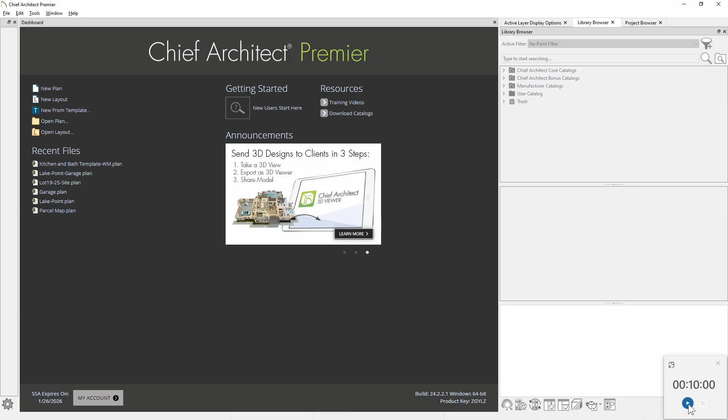So let me open up the program here. Notice in the bottom right hand corner is my timer. Keep an eye on me as we only have 10 minutes to create this mailbox. So let's turn on the timer, and let's begin with a brand new plan. The first thing I'm going to do is, underneath our cabinet tool, come down and grab the custom countertop, click and drag.

While I'm dragging that out, I'm going to put the coordinates in at 24 by 24 to create that custom countertop. Now let's open up the countertop, and inside the countertop we want to set the thickness to be 6 inches and then the height, floor to bottom, should be at 0. And then on the molding profile, this is the edge profile.

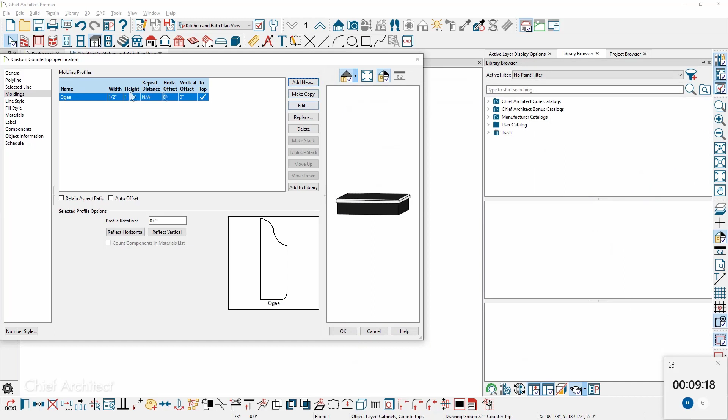Let's click Add New. I'm going to go into our bonus library that I've downloaded, and for the edge profiles, let's select the Ogee profile. We'll set a width of 1/2 inch. You see the profile of it there.

And then let's use the 3D solid tool, and I'm going to create a solid right over the top of this. We'll use our snaps and grab this solid, open it up, and for the solid we'll set the height. This will be the brick, 2 1/4 inches, and then floor to top we want at 8 1/4 inches, so that'll sit on top of the 6-inch countertop.

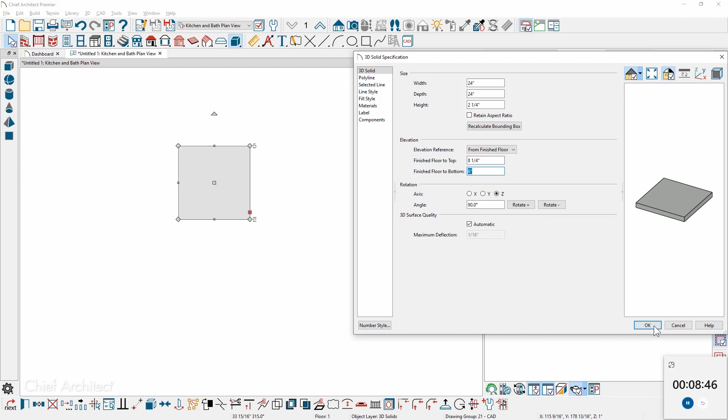So I'm going to use the 3D camera tool. Let's hold our Alt key down to force it into vector mode, and we now have the two objects that we need to apply materials to. So let's begin with a search for stucco. I'm just going to come down and grab a material out of the stucco. Let's apply that onto the molding, also to the countertop below it.

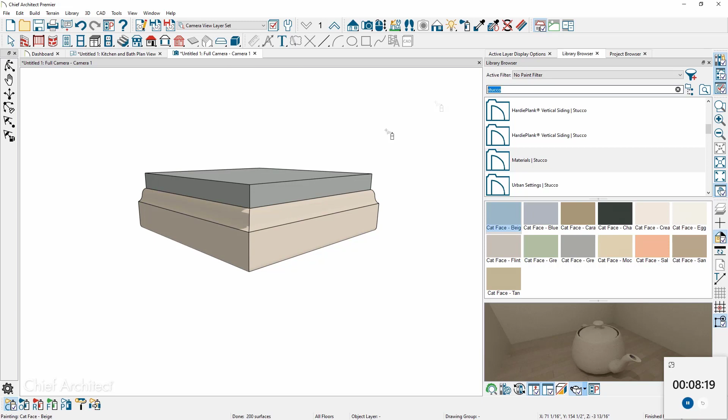And then for the brick, let's do a search for mixed brick. We'll just grab this gray brick and apply it on there. Now you're going to notice that the offset needs to be adjusted. I want a full brick in there. Let's do that from an elevation view and figure out the adjustment. Let me redo that view.

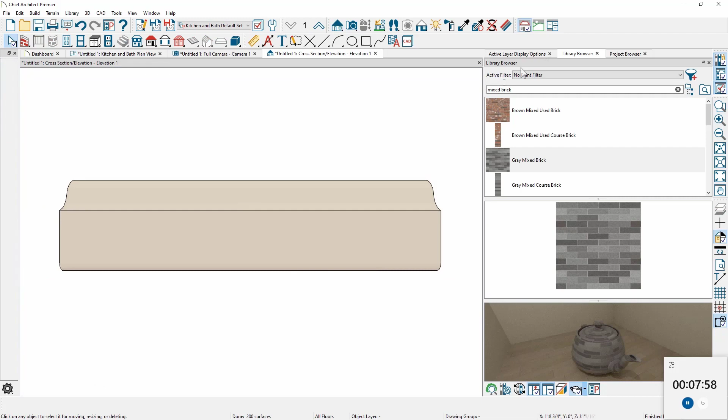So let's take a straight view on. I need to turn on the solid layer. Notice that it's not on. So let's go over into the active layer set. I'm going to turn on all layers. And if we go in there and use our tape measure tool, let's measure this out. It's right about 3/4 of an inch.

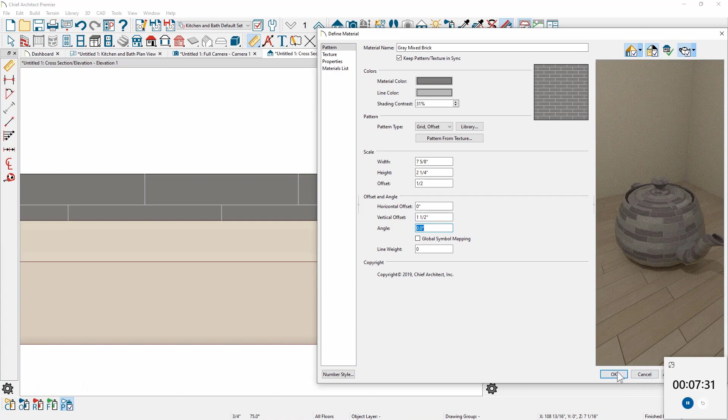So I'm going to use the adjust material definition tool. I'm going to come in and change that offset. Let's subtract the 0.75, and if we did that right, that should be a good look at it.

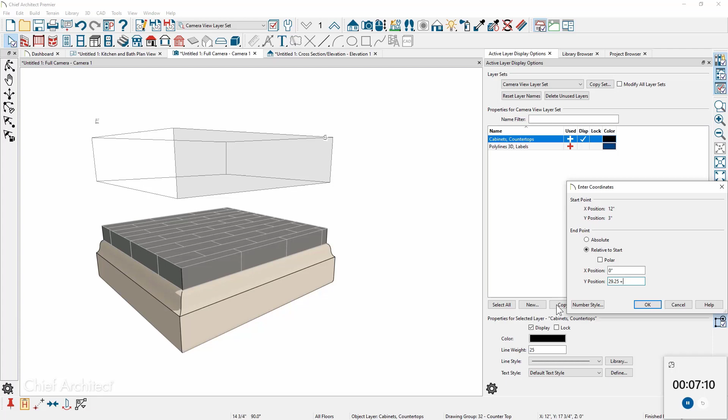Now in the camera, I want to take the lower countertop and slide a copy of that up. As we slide this up, I'm going to press the tab key, and I want to move this up the 29 1/4 inches plus the 6 inches for the thickness of the countertop. So that gives us the top and the base.

And then for the brick, let's click on the brick and use the transform replicate tool. I'm going to make a copy of this. If you looked at it and competed in the challenge, you probably figured out there were 12 copies.

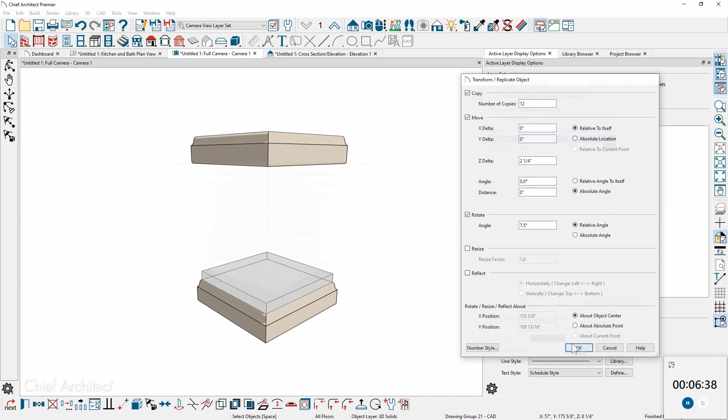We're going to move that up 2 1/4 inches, and then rotate it. Our directions say 7.5 degrees, and that should slide those all the way up. Hopefully the mailman's not going to run into the corner of that when he delivers our mail.

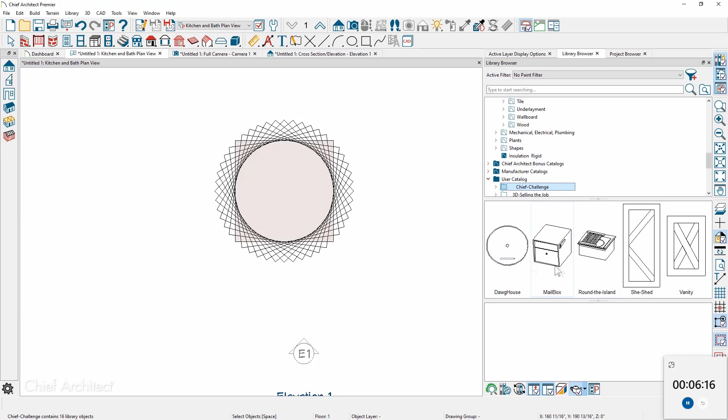Now back in the floor plan view, let's go into the library browser, down to the Chief Challenge library. I provided a mailbox in the catalog, so let's click and place this mailbox off to the side, turn the layer on, and set the floor to bottom at 41 1/4. That way it will be right on top. Let's zoom in and put that approximately in the center.

Now what we need to do is put a roof on this thing, and then we'll use a 3D solid to fill in the space.

To create that roof, let's go into our roof tools and double click on the roof plane. Before I draw the roof, let's set the pitch to 2 and 12, and then on the options structure, let's adjust it to be pretty thin, 1.5 inches.

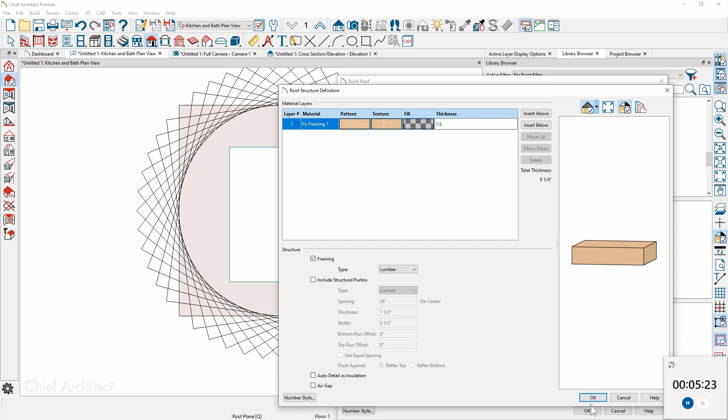Let's go down and look at the rest of these items. The fascia and the rest, let's make those smaller at 2 inches. Remove the soffits, maybe the gutter, let's delete that. So we should be in good shape, my roof is kind of set up.

Let's go in and actually draw a roof plane. We'll click and drag, go up slope, and turn off the automatic roofs. Let's slide this into place and get it close. I'm not going to use the dimension tool to make it exact.

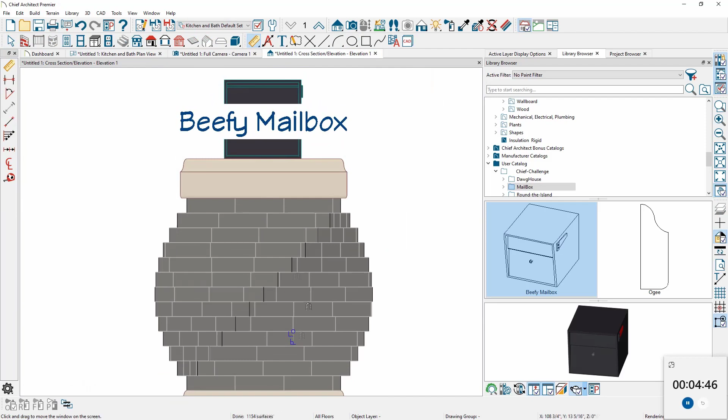Then let's go back in and shoot our elevation view, zoom out a little bit. And there's our beefy mailbox. If we zoom out further, you can see there's the roof plane.

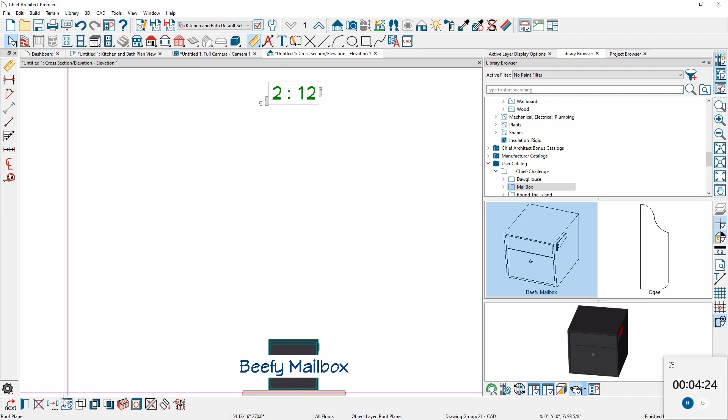If we use our dimensioning tool, let's turn on my crosshairs, slide down and figure that out - that looks like about 55 inches. We need to pull that down. So let's click on the roof, use a transform replicate, and use minus 55 inches, which should put that very close to where we need it to be.

Now to fill the space in here, what I want to do is create a 3D solid. I'm just going to use the CAD tool and draw a solid, which starts with a CAD box.

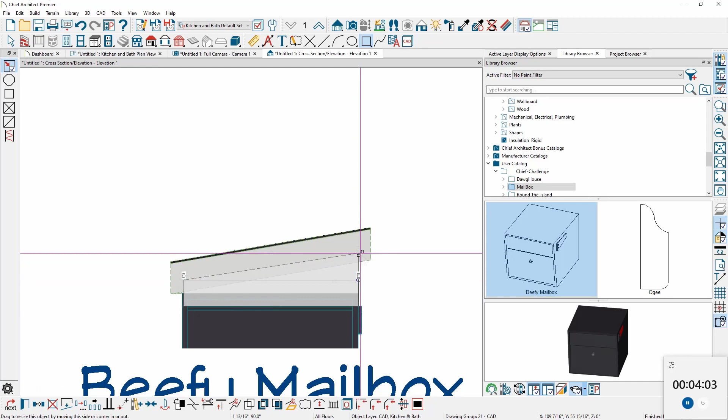Maybe shape that up just a little bit so we have it in that position. I'm going to convert it to our 3D solid, and maybe set the depth of it - let's just pick a number at 17 inches.

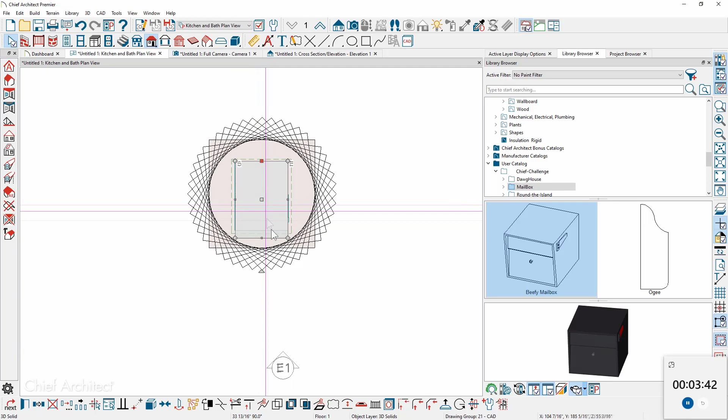In our floor plan view, let's make sure that we then position that right over the top of the mailbox, and let's just use our snap tool to pull it in there.

In our camera view, you can see where we're at here, and the first thing I'm going to do is probably pull this edge up in this direction, go around the back, and make sure that we get this pretty close. I'll just grab the corner here and pull that up.

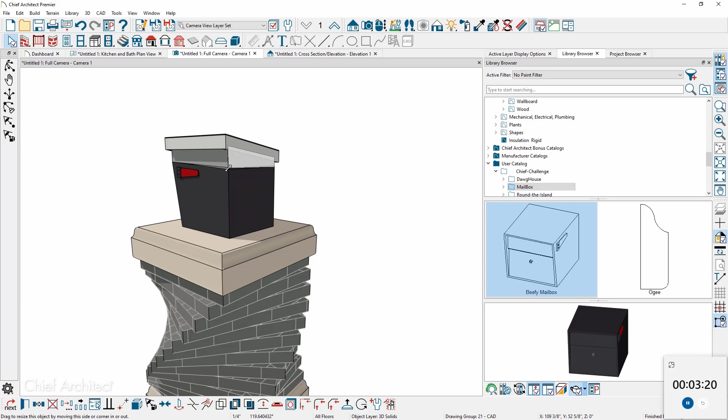And then let's use our material eyedropper to grab those couple of colors. It looks like maybe a slight adjustment on the front - pull that down just a little bit. And I think we've got it.

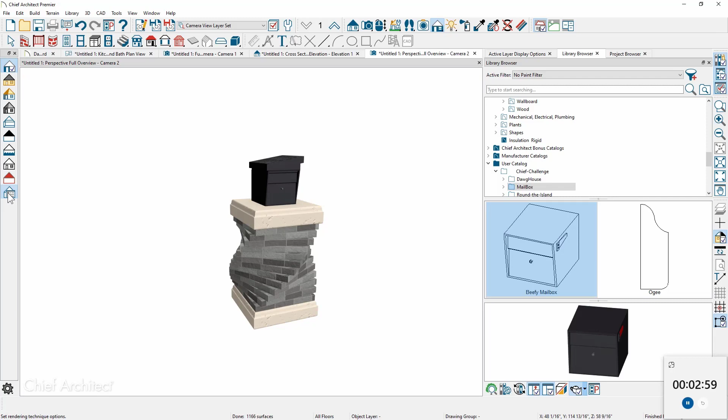Let's go back into our floor plan view and take our 3D overview with a standard render. It's looking pretty good. One of the things I like to do - let's go into our render techniques and turn on line drawing, and we'll just dial that in a little bit. And there is the mailbox.

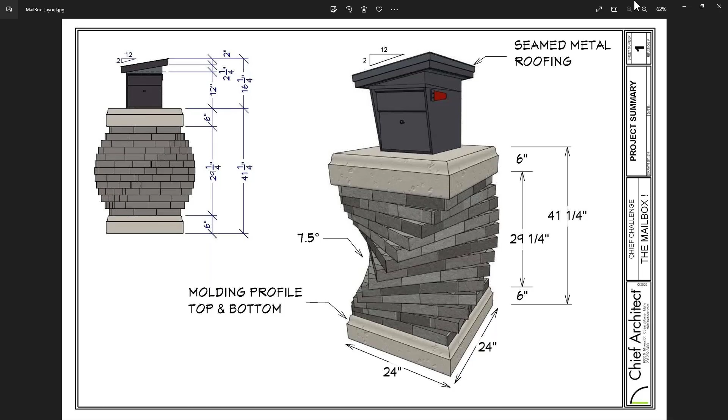We had somebody write in and ask, could you repeat the transform replicate process on the brick one more time? Yeah, sure. Well, let's just grab the mailbox plan here, and let me grab the other one here.

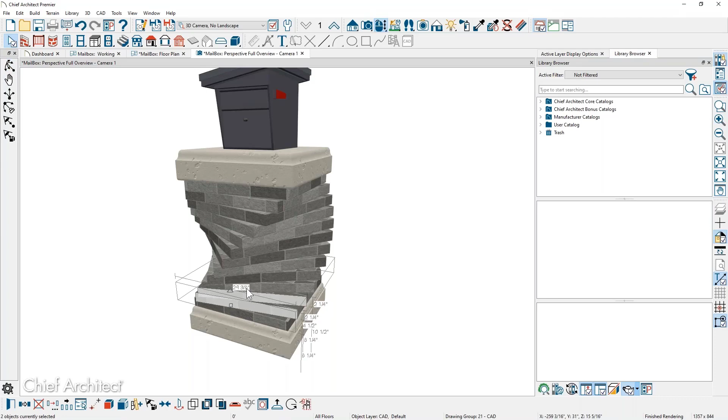So when you look at the mailbox that we have, that transform replicate can be used for a lot of things. In this case, we made multiple copies using a rotate, setting the elevation of that rotate as we made the copies. If we go in here, I'll hold my shift key down and go through, removing these off the current mailbox. So once I've got the 3D solid in place, and I select it, this transform replicate tool—you notice I also used it to lower the roof down in the session as well.

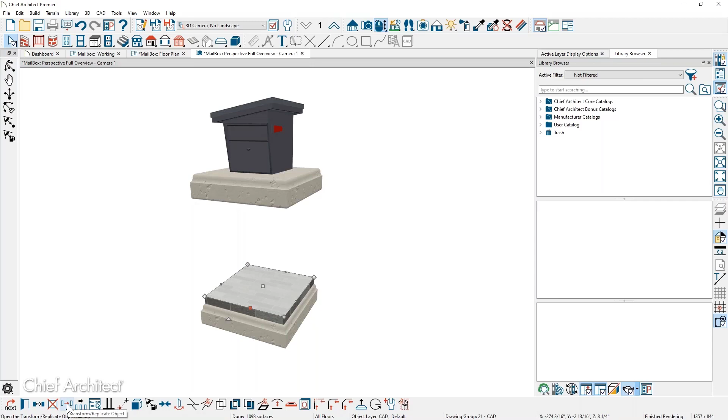In the lower edit menu is this tool called Transform Replicate. With the Transform Replicate, there are several items you can control. At the top is the copy, where I put in how many copies I wanted to generate when I use this. Then I use the move operation, so there's an X, Y, and a Z. Z is in the height direction, and it could be negative or positive.

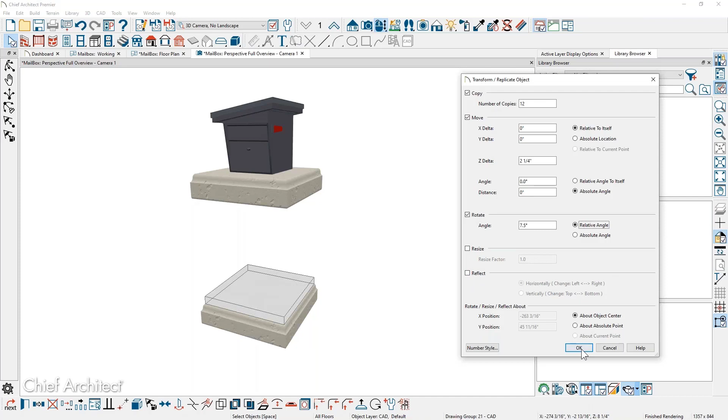I put in the distance or the thickness for the brick itself, so that's a 2 1/4-inch slab of brick. Then for the rotation, I think that's a 90-degree rotation, and if you divide that out by 12, it should be 7.5 degrees. There's also a resize and a reflect option, so there's quite a bit of power in this tool. Once you close that dialog, you can see that it automatically generates this for you. It's a pretty powerful tool.

A lot of times I'll use this to fill various spaces. You might even use it for electrical—you could place and use the electrical, and use the Transform and Replicate tool to then fill a space. It's a pretty powerful tool. If you haven't used it, consider looking at the details of it for your next design challenge.

Thanks, Scott. Before you used the Transform Replicate tool, you adjusted the brick pattern with an offset. Can you demo that one more time?

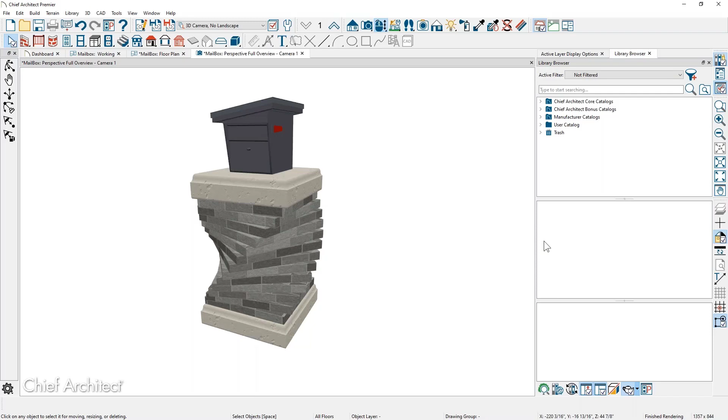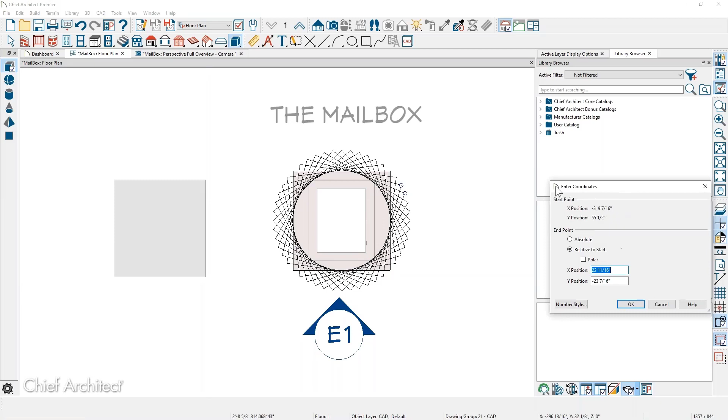Yeah, so let's switch over here. In our floor plan view, I'll use the 3D solid tool and kind of replicate the process and create this solid. The first thing I did when drawing out this solid, it turns out it's 24 by 24. Before I release my left mouse button, I'll press the tab key, and what that does is bring up the coordinates. This is a nice tool because you don't have to use your temporary dimensions and then set the dimension of this both in width and in depth.

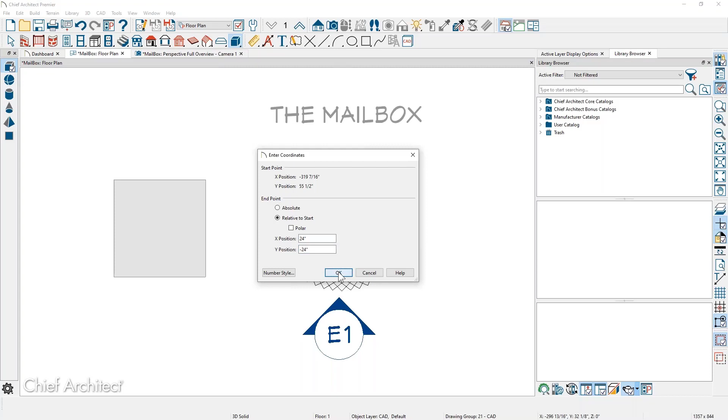So with the coordinates in here, I can put in 24, and in this case I drew it in the down direction, so I'll put -24. That then brings it in. Depending on the elevation and the material you're going to use—in this case, for this particular solid, we set the height of it 2¼ inches, and then the floor to bottom was 8¼ inches.

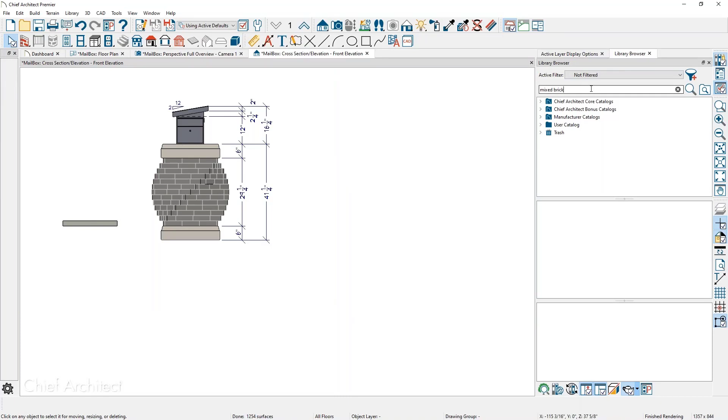And then when we take our elevation view, we find the brick—let's go find mixed brick and spray it on there. As I zoom in, you can see that the pattern is not adjusted. So if you wanted to have a full brick, a lot of times this is a very nice tool to use—the Adjust Material Definition tool—for your showers or backsplashes where you want to start with a full tile, or in this case, a full brick.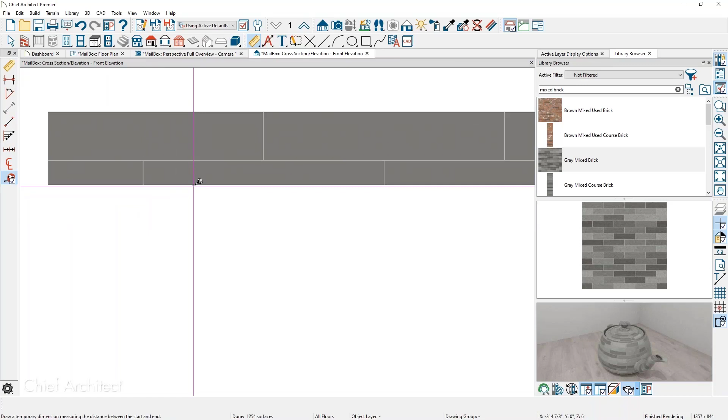The first step in doing this is to determine what offset you need to change. The tool I used to figure that out was the tape measure tool. I came in here and measured up and found what the distance was—measuring from the bottom to that first grout line is 3/4 inch.

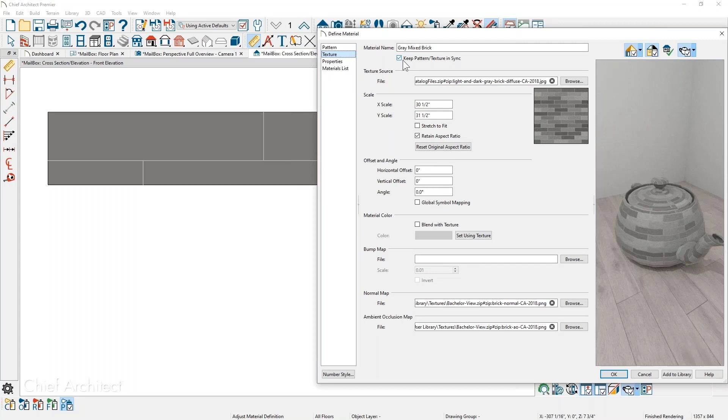That Adjust Material Definition tool, sometimes called the rainbow tool, is up in my upper menu system. You can click on this, and it allows you to adjust the pattern, which is the texture you're looking at behind this dialog, and then the texture itself, which is the image of the brick. There's an option to keep these two things in sync, so if you make an adjustment on one, it adjusts the other. That's oftentimes a desired outcome.

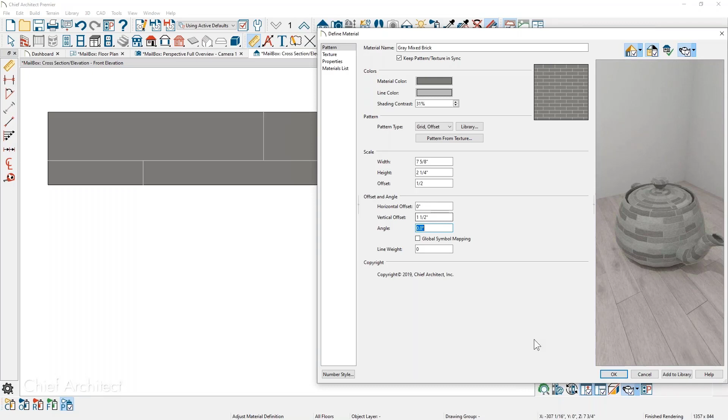Currently there's already a vertical offset in this material we used of 1 1/2 inch. You could zero that out and it may work, or what I ended up doing, since I measured it, is set it to -0.75, 3/4 inch. That adjusts it, and when I close the dialog, you can see it adjusts that texture accordingly. Now I have a full brick, and I did that before the Transform Replicate, so that it moved all of those items and they all had the same material and correct texture pattern where I wanted that brick to start.

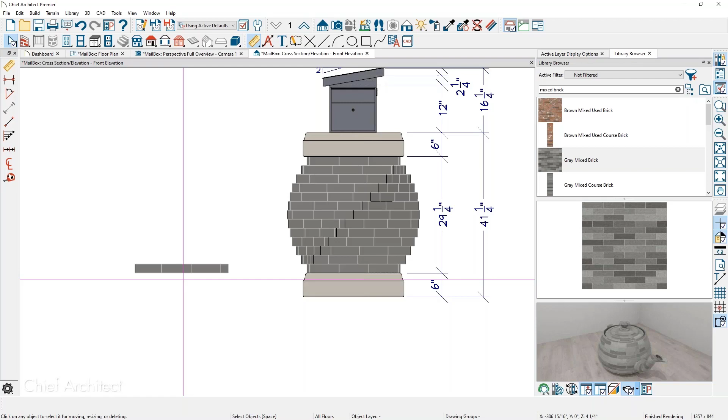Thank you, Scott. We had Sandy write in, and she's wondering what is the reason that you use a countertop for the base rather than maybe a 3D solid? Yeah, that's a great question, Sandy.

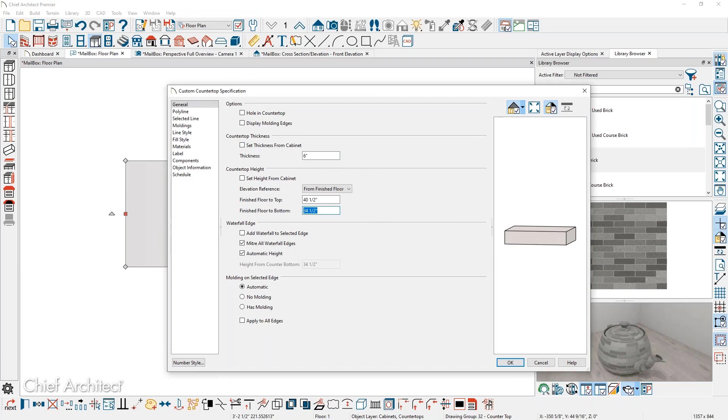So I drew the solid over here, and if I come over here and use the countertop tool, we just kind of drag in a countertop. Let me set the thickness of it so that it's at least thick enough, and then we'll set the floor to bottom at 0. So when you're looking at this in the view, the item on the left is the countertop, and the brick slab next to it on the right in the middle is a 3D solid.

One of the options a countertop has over a 3D solid is you can assign a profile to it. If you look at the bottom of the mailbox here, you see the profile on the countertop, and inside of the countertop itself is a molding panel. That doesn't exist on the 3D solid, that panel.

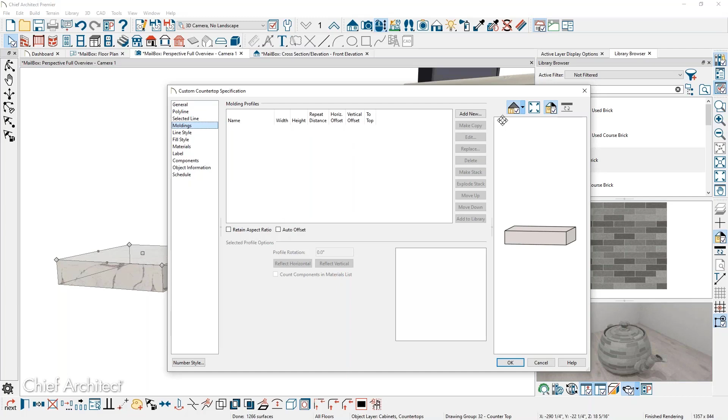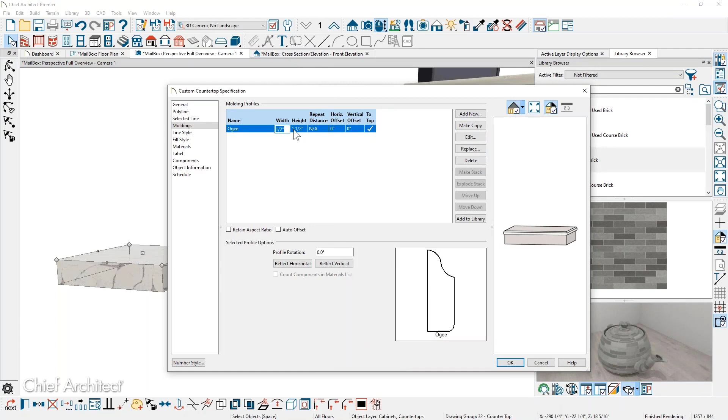So what I ended up doing, which saved me a little bit of time, was on the molding panel I came in, and we provided a molding profile for you. There's a bonus library and a core library of edge profiles for countertops you can choose from. I made a copy of the Ogee profile, and I ended up setting the width and height of that at 6 inches, and that assigned a profile.

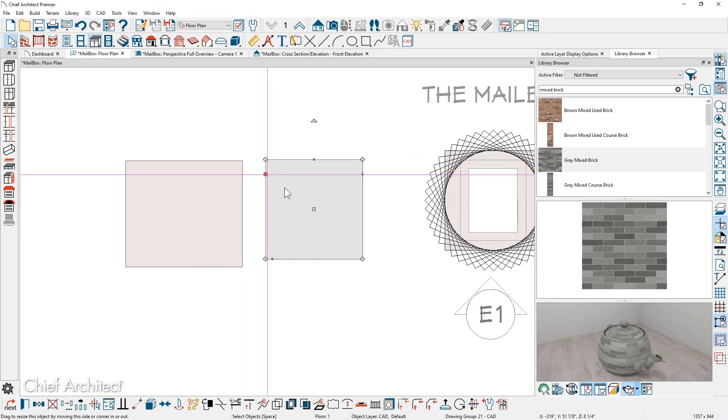Now I know some of the submissions used a 3D molding to generate the profile. That's also pretty easy as long as we're in here. What I could do, since I've already drawn the 3D solid, is make a copy of that and then convert that into a molding profile, so I don't have to be exact when I draw this. When I convert that into a molding profile, I'm going to use convert in the middle bottom of my screen here, convert to a plain polyline. Then when I convert that, I can come in and choose that it's a molding polyline.

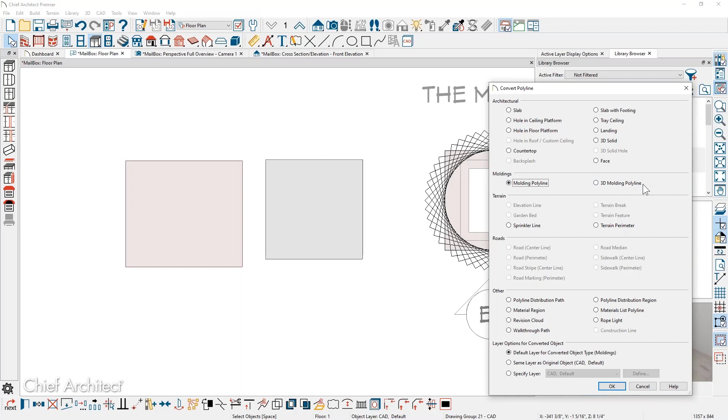You can also use a 3D molding polyline, which simply means in addition to being horizontal, it could also go vertical. Once you convert that to a molding profile, you can set the height of it, and then, kind of the same process, go out and choose the molding profile. If we just grab the exact same ogee, I think we said 1 by 6.

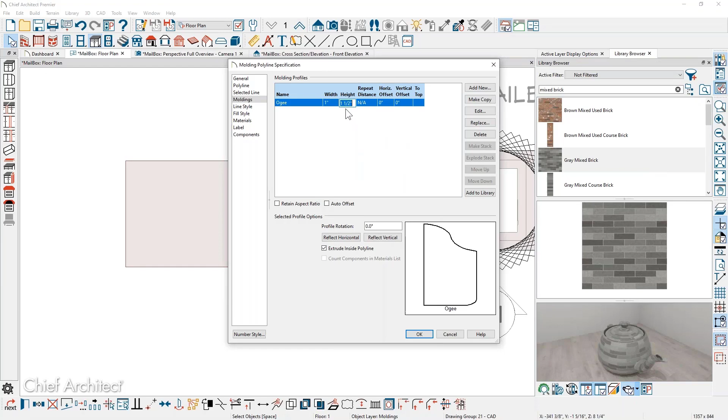So a few steps to do that, and we go back into the camera view. It looks like I actually converted it but didn't make a copy of it. You'll notice the molding's going on the inside, and one of the options I didn't choose was to extrude inside, so that will extrude it outside. That's how you can convert that molding.

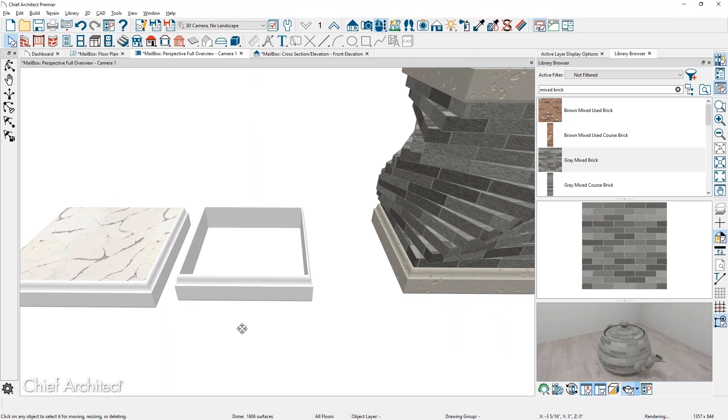It looks like when I converted that, I didn't actually make a copy of it, so I just come back in here and draw another solid in there, and we set that back to the height of 2 1/4 inches, and it should look okay when we go back into the view. Set that back to 8.

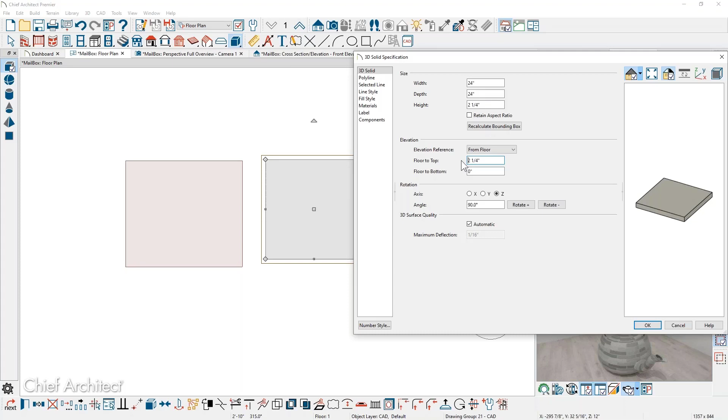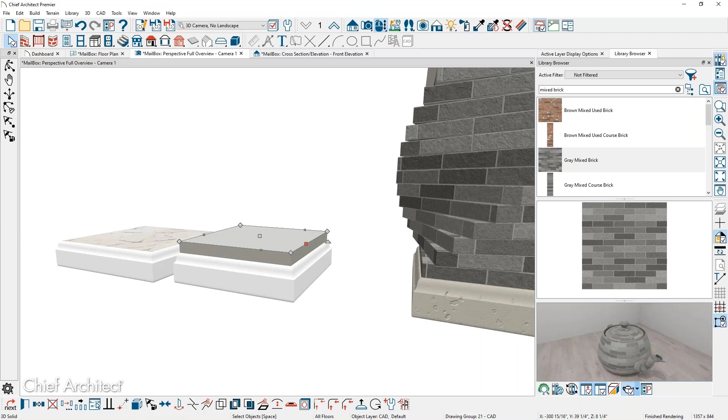So that's kind of the process, and the countertop's just going to give you the ability to get the molding. I was in a bit of a hurry to try to get that done in 10 minutes, and I like the option to be able to set that profile automatically for the object itself, and that's why I used a countertop.

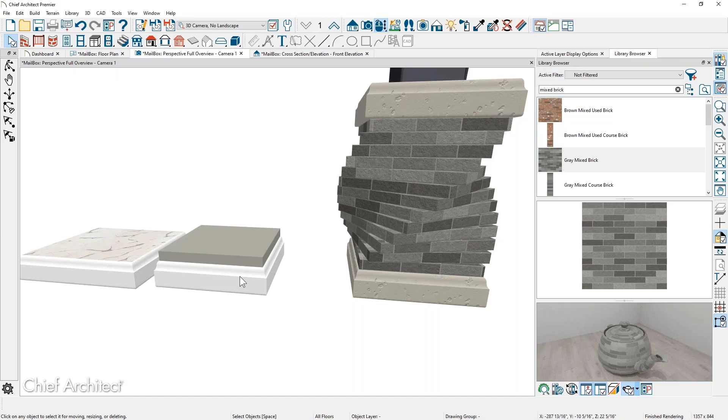Thanks, Scott. We have a follow-up question from Albert, wondering why didn't you use the countertop tool for the brick portion instead of the solid? You certainly could have. I was trying to show off multiple tools. There are times when the material mapping for countertops is not as easy to coordinate on the back side of the countertop. So sometimes on the back side, the brick mapping, if we were to rotate all the way on the back side, sometimes there's issues the way the program handles that, because typically the countertop may be against a wall, and sometimes that mapping may be an issue.

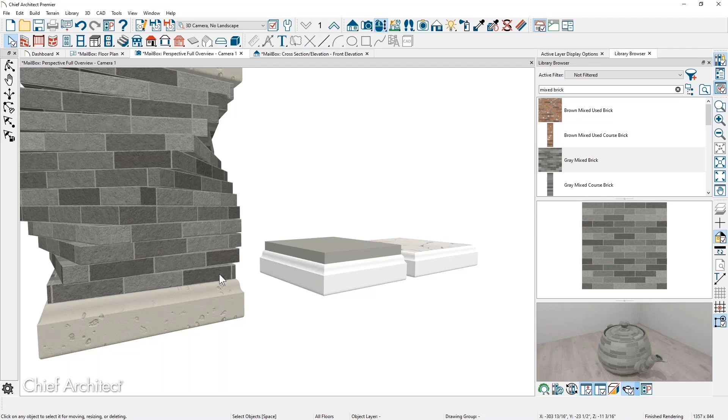And I just ended up using a 3D solid tool because I wanted to show the difference, but you certainly could have used the countertop tool to have accomplished all of the rotated brick in there.

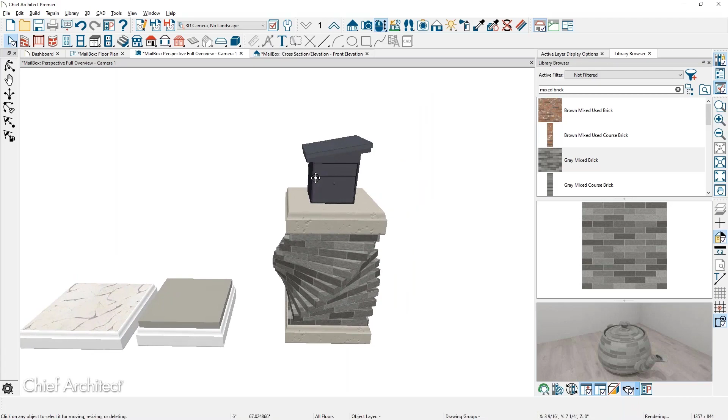Okay, great. Our last question is from James. Can you demonstrate how the roof was generated? Yeah, sure. Thanks for the question, James. So there's a few ways that you can generate this roof. I ended up using the roof tool. It's already got the slope built into it. I had to adjust the thickness because it's for a mailbox, not a house. And I saw some of the submissions that came in that used a 3D solid, and very effective to do it that way as well.

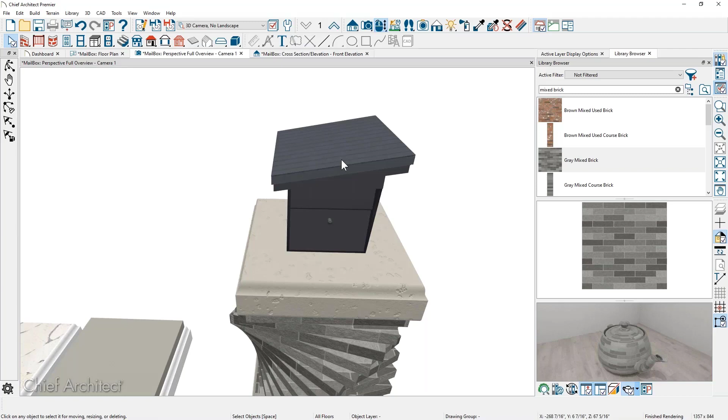So when I created this roof, this will be easier to do in the plan view here. So underneath the roof, let's just look at some of the settings I changed in there. So the first thing I did was I changed the pitch to 2 and 12 because I'm going to draw a shed roof. And then most of the template plans in Chief Architect, I think, may include automatic roofs. So when I manually drew the roof, it prompted me to turn it off.

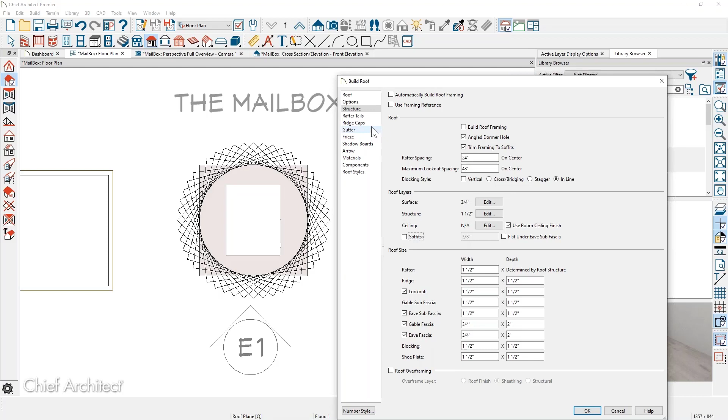So with the pitch at 2 and 12, I then went into the structure. I lowered that structure, probably the default's 9 1/4, so that it's only 1.5 inches thick, and probably a good idea to turn off the soffits. And then for the fascias, I didn't want that to protrude too far down, so I set that pretty low. I think the default had a gutter on it. I removed the gutter. If you have shadow boards, obviously you want to turn that off. So once the defaults were set, then I used that manual roof tool.

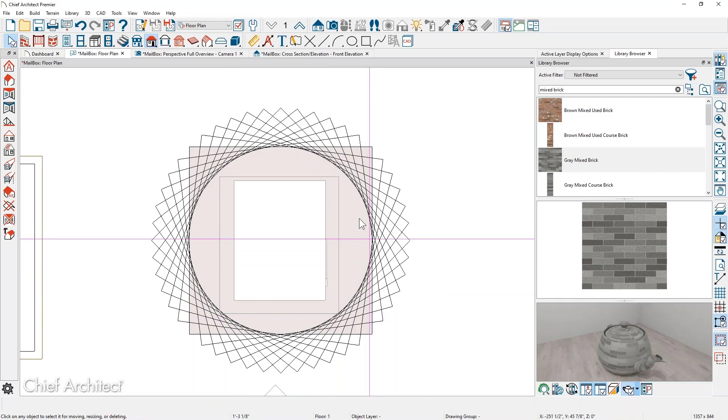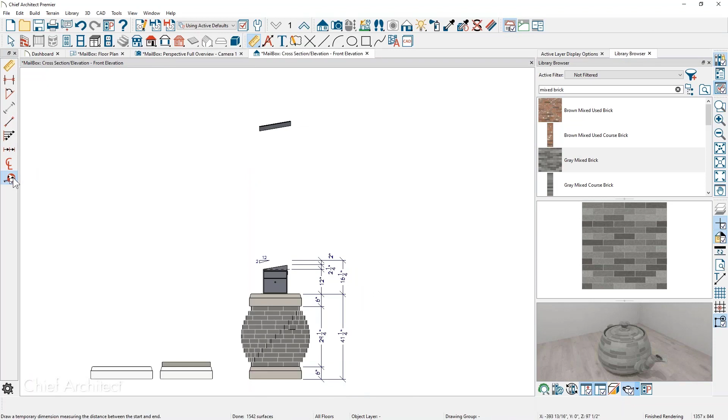And the way those roofs work manually is you click and drag on the outside of the wall, then you click up slope. That generates the roof at room height. So for this mailbox, it's going to be quite a ways up here because our default room height is likely 9 feet. So then all I did was use the transform replicate, move that down the amount that I'm going to measure. You could also open up the roof. So using that tape measure tool, I measured about where the top of that mailbox was. Let's call that maybe 67 inches or so.

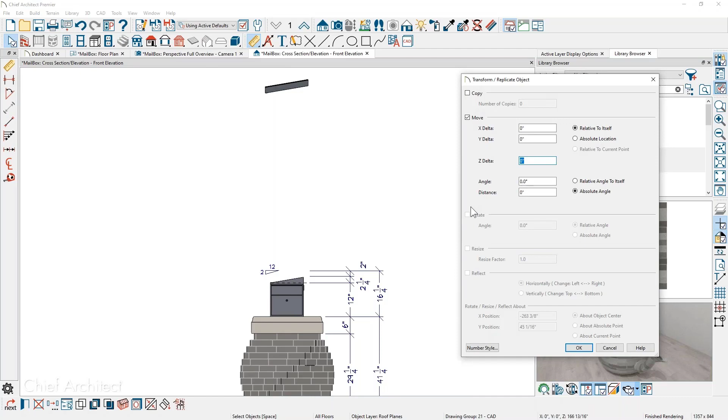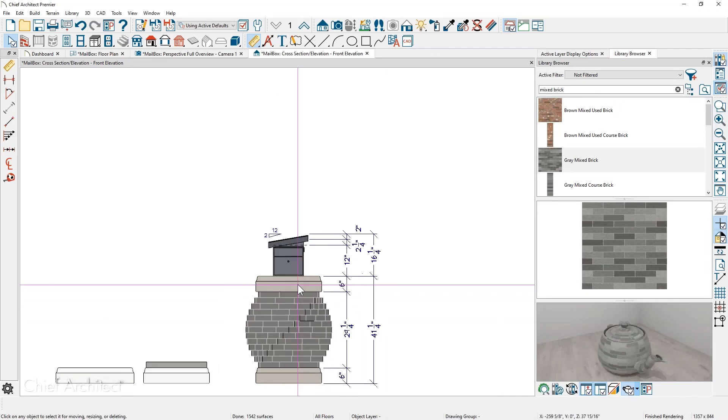So 2 ways you can do it. One, you could click on the roof, use that transform replicate tool, and in the Z direction, minus 67 inches, that will pull it down. Or undo that. You could go into the roof itself, lock the pitch, and then we could subtract, let's pull that down slightly more, 68 inches. And then that will also pull the roof down. So a couple different ways you can adjust the roof.

Now, if you're using a 3D solid, it's actually maybe even faster than what we did. So using the 3D solid tool, I'm just going to click and drag right in here a 3D solid. And let's just make it a little bit bigger for the overhang. So now we have this 3D solid, and with one of the bottom edges or the top edges selected, there's a make parallel tool.

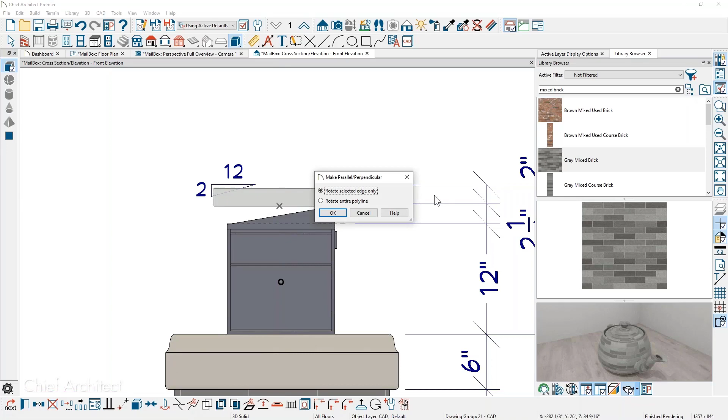And the make parallel tool can be on a per edge basis or on a per object basis. And let's just look at it. So you can rotate either the selected edge or the entire polyline. And if I select the entire polyline, I can then rotate the thing.

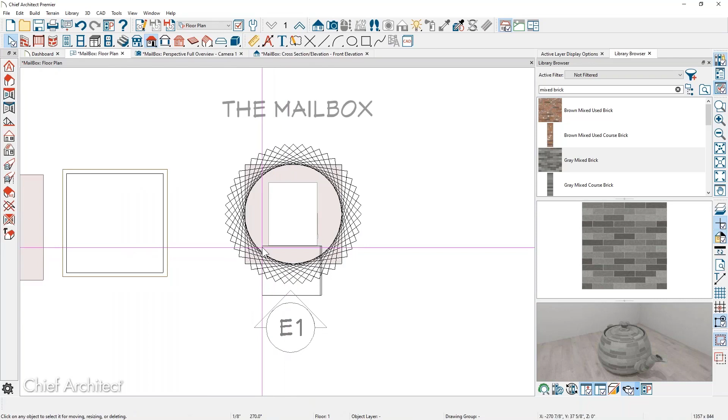We can pull it down so that it's right on top of the other solid that I used to fill the gap. And then probably in the floor plan view, we just need to pull this guy back. Let's pull that back so that it adjusts. And that is probably a faster way to generate that roof. And then you just change the materials, pull it down, adjust that.

So that's a pretty quick way to use the 3D solid tool to generate a custom roof plane. Of course, in building a house, you would get no framing, so this wouldn't really be a great tool to use for house, shed, whatever it is. So hopefully that helps with the roofing question.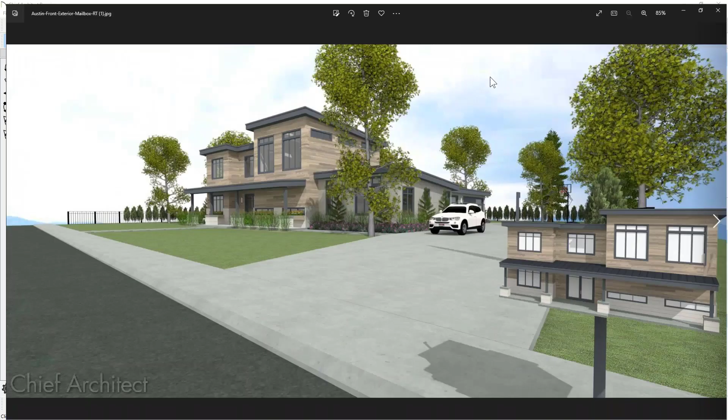So one of the things that periodically comes up, if I just had an image here that I wanted to show real quick. Pull that over. A lot of you are probably more designing homes or interior spaces. And since today's session was on mailboxes, hopefully there were a few tips you could pick up that you can use for your typical design process. But in these couple of images here that I have open, I've used the larger house and then converted it to a symbol and used it as a mailbox.

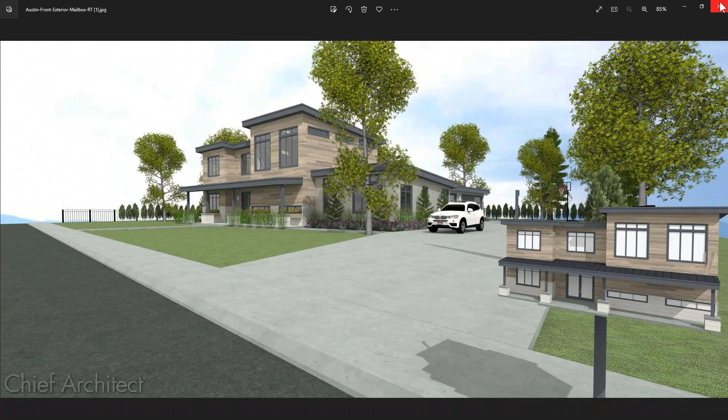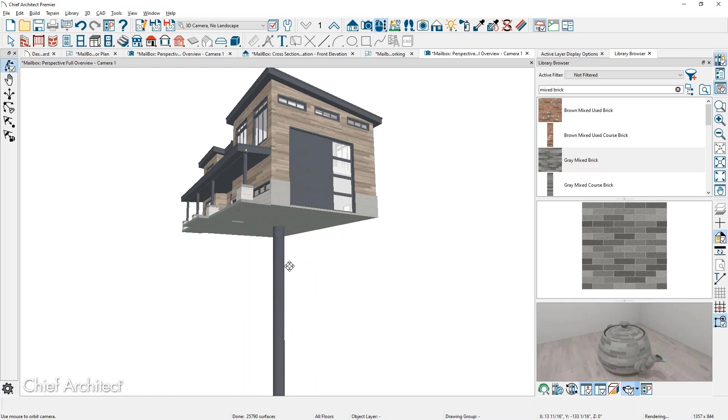So just briefly to show that process and how you might do that, if I were to open up a variation of a plan, and this is an entire house, what I did here is I made a slight modification. I put a big garage door on the side of the house, and then underneath of it, I used the solid tool as a cylinder that would act as a post, and then I also used the solid tool to act as the mailbox flag. But this house is probably 75 feet wide by 40 feet deep.

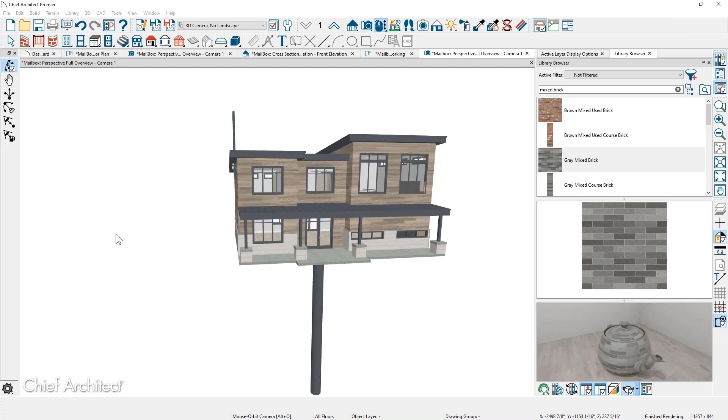So working it out as a mailbox, what I did is I converted it to a symbol. You can go into the tools menu, come down to symbol, convert it to a symbol, and we just give it a name here. And there's some advanced options. Probably just make it an exterior furnishing, and probably don't need to show the advanced options. That now goes into my private library.

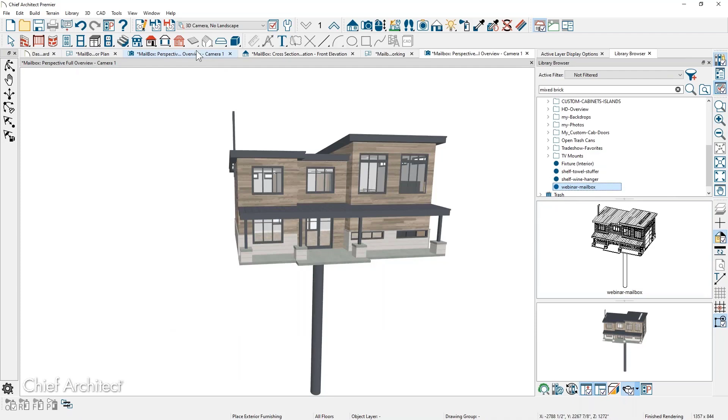You see a preview of it, and now I can place that, and the only thing I really need to do is shrink it. And so sometimes it takes a little bit of trial there, but if you open up that object, we can go in there and adjust it, and it may be easy just to open the symbol up and or use the transform replicate since we're talking about it. So in the floor plan view, if I place this guy, he's going to be pretty large. So let's zoom out. You can see how large it is in comparison.

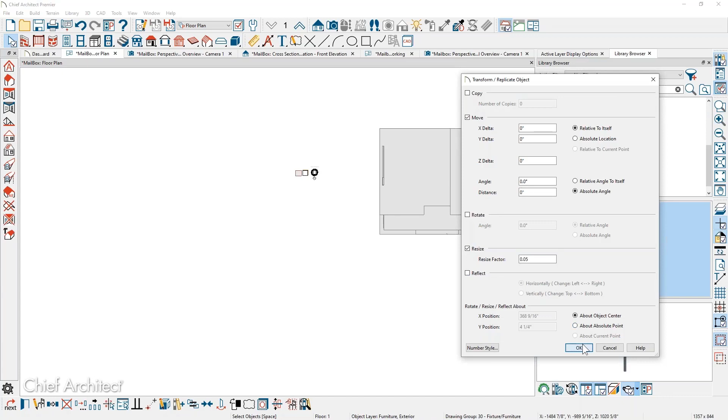And then if I use the same transform replicate tool, then I can resize that pretty substantially. Let's try 0.05. And let's just stick him over near the plan we're working on. Go back into the camera view and make sure that we turn the layer on that would have all layers. So there's a pretty quick way to make a copy of the house you're working on as the mailbox and make it a symbol using the transform replicate option, and you can shrink him down and create a custom mailbox. So kind of a fun little tip there.

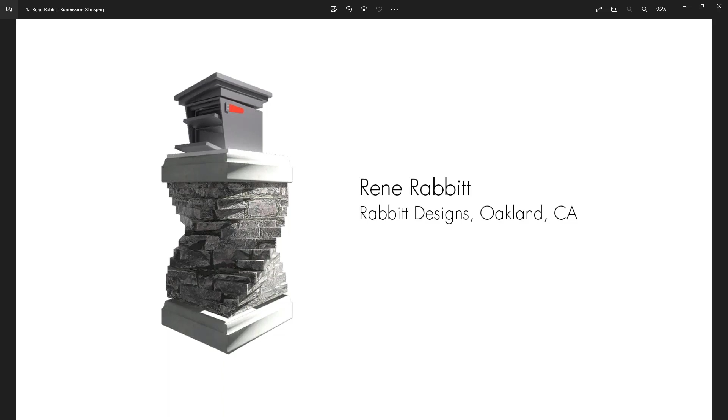Yeah, can you hear me? Hey, Kelly. Hi, how are you? Yeah, good. Hey, good looking mailbox. Tell us about it. It was fun. Lunch and learns are terrific. Even if you think you know a lot, you always pick up new tips.

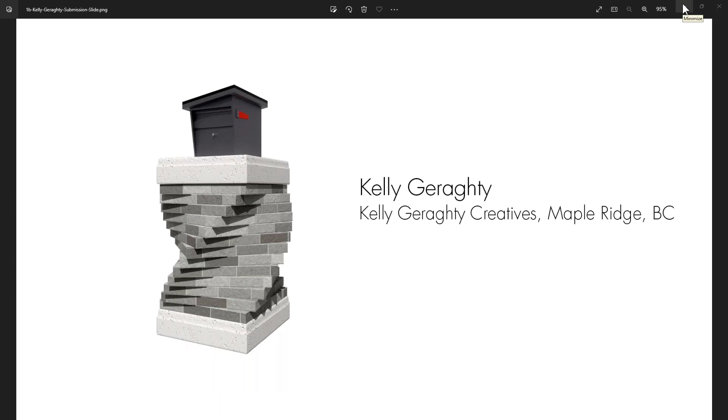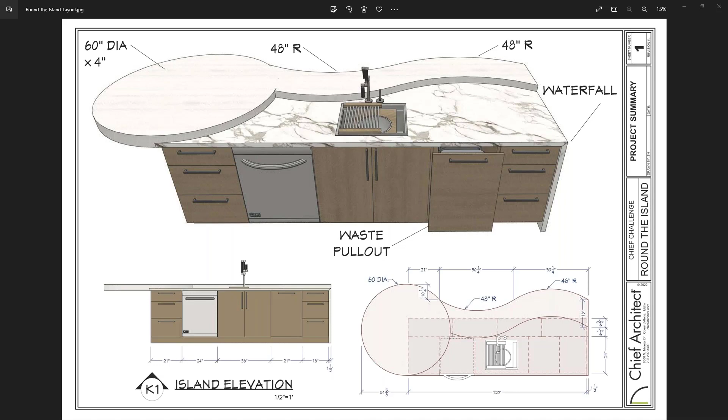A few other things that we have coming up to share with you before we let you go real quickly. Already mentioned that next week we'll be doing the kitchen island, and then the next two coming up would be the she shed and doghouse. Apparently only one quote on the doghouse. And a couple of fun projects. They will get more difficult as time goes on. I'll be interested to see if we can actually get them done in 10 minutes ourselves.